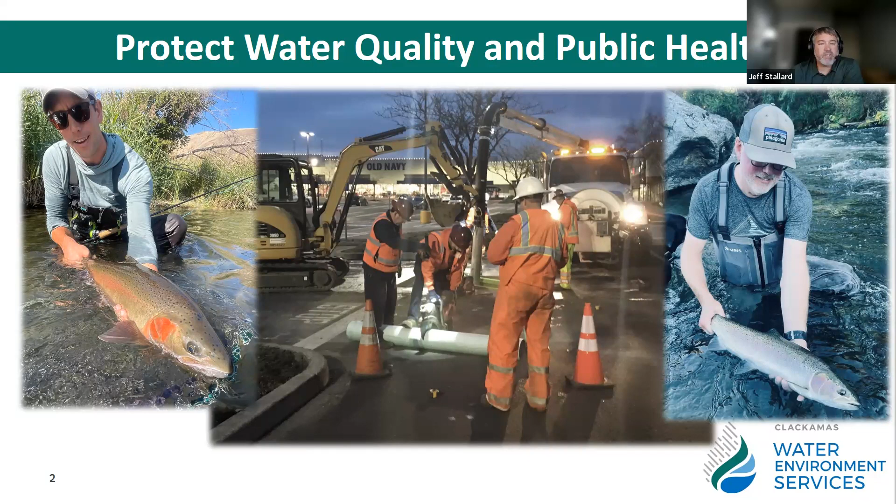So I just want to acknowledge the efforts of the people on this committee and within the WES organization that continue to be dedicated to protecting our environment, protecting our water quality and advocating for public health. I love exploring the outdoors and it's something I'm passionate about. So thank you very much.

Quick outline of what I'm going to be talking about. I'm going to give a background on the capital improvement plan development. So what's the basis and how do we build our capital plan? I'll spend the bulk of the presentation talking about the updates and the projects that we currently have underway. A little bit of one slide on next steps and what we can expect to see. I'm kind of setting the table for the next presentation around an updated capital improvement plan for 23 through 28. And then I'll hopefully have extra time for questions.

So our CIP is developed with extensive planning efforts. Over the last 6 years, WES has really embarked on a planning journey, and out of each of these plans come recommendations for improvements to either provide additional capacity or address condition deficiencies within our infrastructure. We take all of those projects or recommendations from these plans, we try to prioritize them and schedule them based on what's the driver and how much the costs are, and build an implementation schedule, and the result is the capital plan.

Many or most of the projects you'll see are interrelated. If we're making an improvement at the treatment plant, we have to make sure all the downstream capacity is there, which is why we're working on an outfall. But I just want to address that it's really thoughtful planning, which is critical to ensure that WES is making the right sized investments at the right time to address the needs.

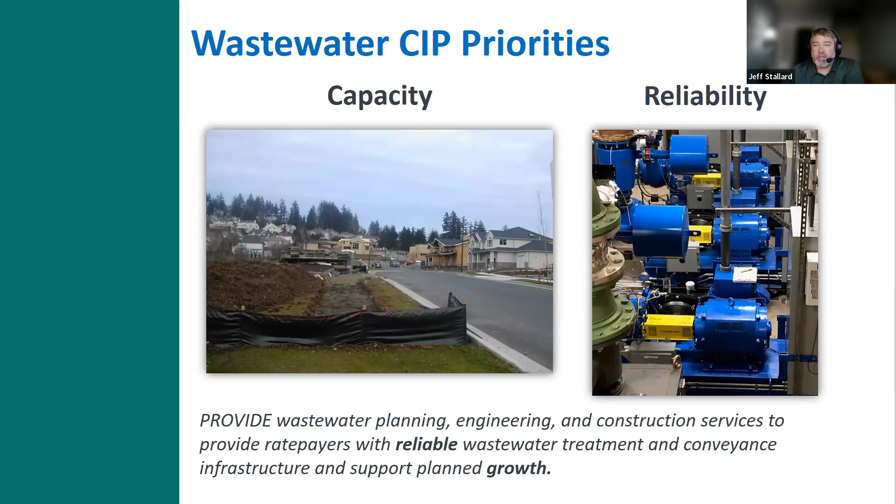You can see about 60% of our capital expenditures really are about reliability. It's about making sure that we're replacing aging infrastructure before it fails. And 40% is capacity. So it's about a 60-40 split between reliability and capacity. And that's not only true for the next 5 years, but if we look even further in our planning documents and project out a 12-year look ahead, we still see the same thing, about 60% reliability and 40% capacity.

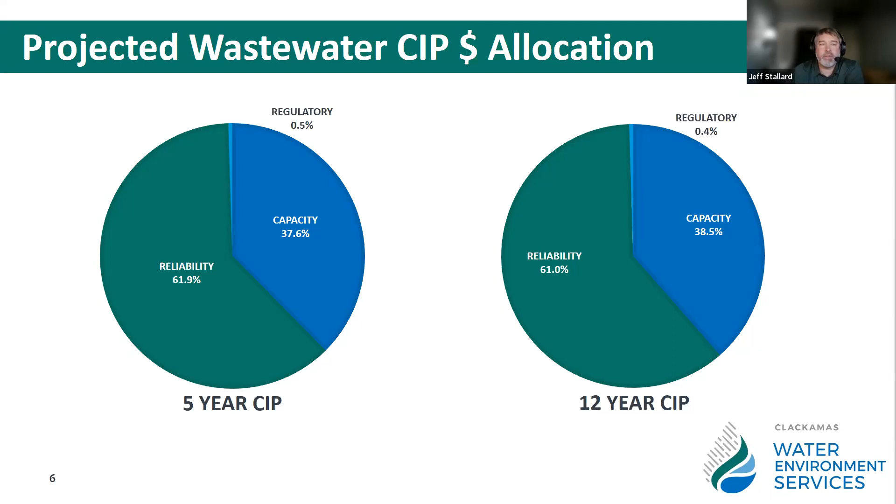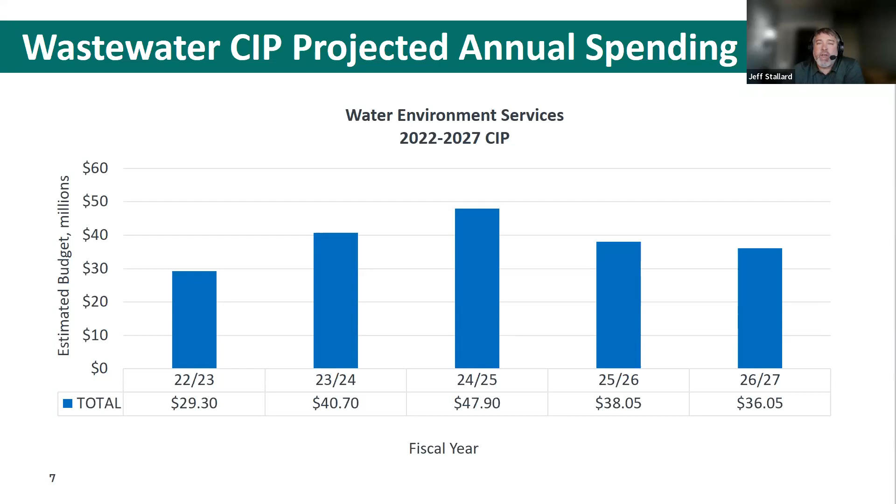Just a reminder on what the 5-year CIP looked like that was approved in 2022. As you can see, we have a lot of money to spend over the next 5 years, and we're working really hard to do that. But in the end, we can have all the planning documents we want in the world, but if we're not actually implementing the plan, then we're not doing our job. And so I want to take just a second to really dive into how we are doing delivering the CIP.

Looking back at the 22-23 CIP, we had planned for 25 projects to be underway or being worked on. We're currently at 24. We're working on 24 projects. We did decide to postpone one project that was determined, once we started to dive into it, that it really wasn't necessary at this time. The solids project really handled that, so we could delay that work a little bit.

So that's projects. And then when we look at budget, we had budgeted $29.3 million, and we estimated to spend $17.8 million. So we're a little underspending. Some of that is due to equipment delays and things of that nature where construction just didn't quite go as fast as we had planned for. And overall, we have 51 active contracts. That's between design engineers and contractors that we're managing as a capital improvement group. So we're all very busy.

So what really impacts our ability to deliver the CIP? A lot of it is staffing. How do we have the capacity in place to really have the project delivery staff to do that? I've been with WES for 6 years now. And in my 6 years, we've really only had a full capital engineer group for about a year of that time. We've had 3 retirements, we've promoted 3 within. So there's been this constant state of change, but it's not all that people are leaving. Some are retiring and some are getting promoted, and we're bringing in new people.

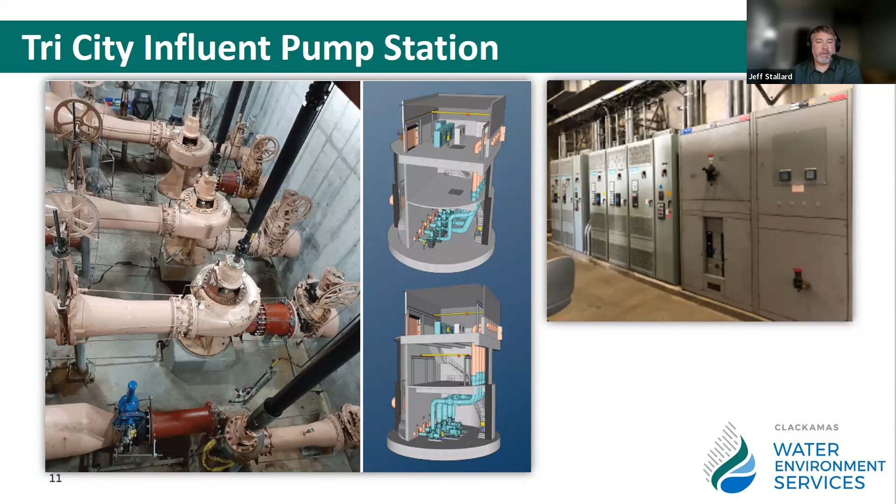So we are doing an overhaul of our primary clarifiers at the Tri-City facility. We're rehabilitating the concrete inside the tank, and we're replacing the mechanicals. But before I talk about it, I want to take a moment to outline what exactly the purpose of a primary clarifier is. The primary clarifier is the final physical treatment process that removes solids before the biological treatment starts. So wastewater enters the clarifier tanks.

The flow is slowed down significantly, and floatable solids, which we call scum, are removed by surface skimming. And the settleable solids, which we would call sludge, are collected on the bottom of the tank. They're raked down to a low spot, a sump, in this basin, and scum and sludge are pumped over into our digesters. The effluent of this tank's next step is biological treatment. It leaves the clarifier over a weir and heads towards the aeration basins.

To paint the picture, you get about 90 to 95% of the settleable solids out in this process. It's a very effective process and is critical to making sure our plant runs well. All the original equipment has been in service since the mid 80s when the plant was brought online. As I mentioned before, this project consists of replacing all of the mechanical equipment and repairing the failing concrete surfaces.

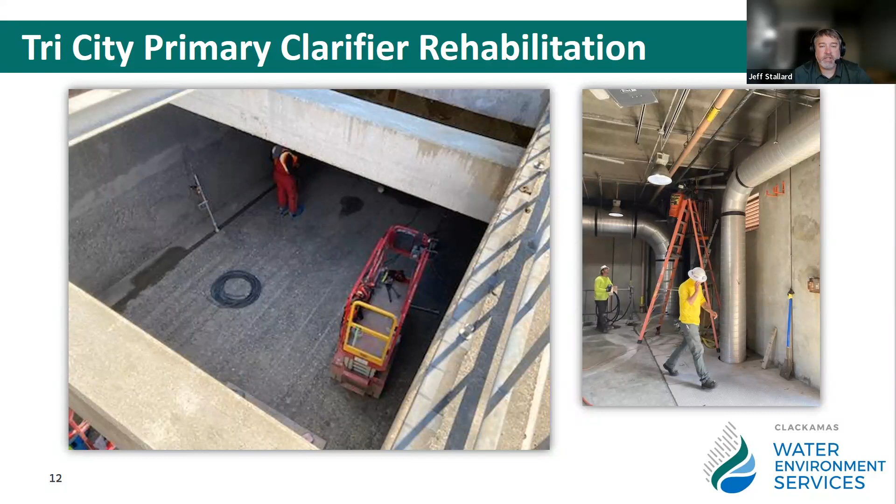The third big project we have going on is at the Tri-City Outfall, and I've presented on this, so I won't spend a lot of time talking about it in detail, but the current outfall was constructed in 1984. It's nearing capacity in our peak wet weather events. We are negotiating with a contractor right now for price to build the outfall.

The plan would be to start construction early in 2024 and build out to the river, and then come back in the summer of 2025 and finish the last portion of the pipeline in the river in the 2025 in-water work period.

It's a 90-inch or 7.5 foot diameter pipe. And we are working on an online virtual tour for those interested in the project. We expect to have that available by fall, and we'll be updating that with pictures and videos as the project's built. It's a pretty exciting project and one of the bigger tunnels in our region.

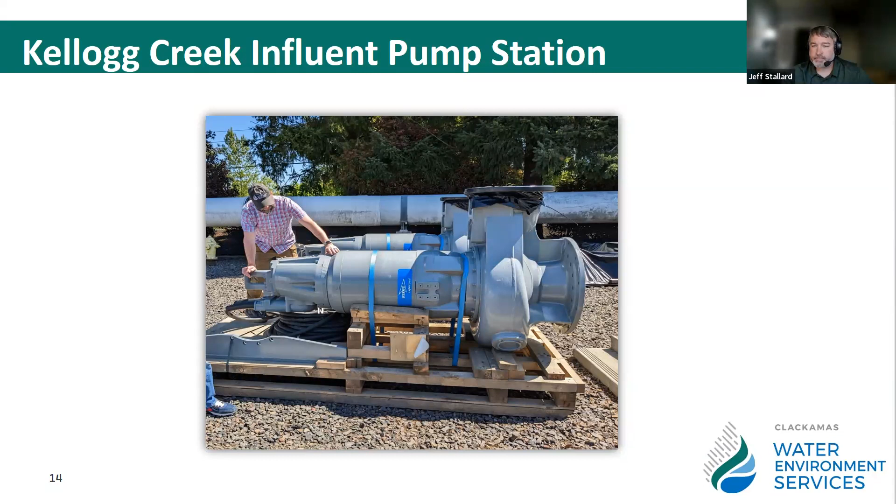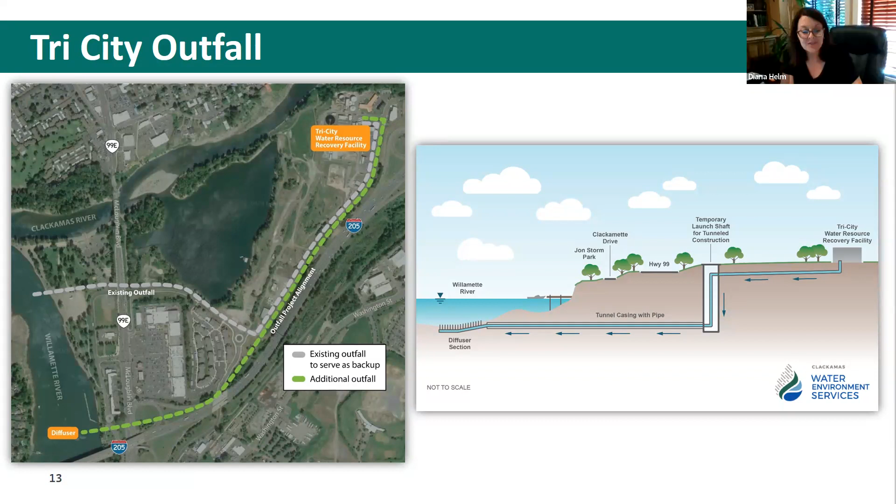Influent pump station at Kellogg. Next project we have at Kellogg Creek is the aeration basin improvements. The aeration basins are where the biological treatment really is. They're the heartbeat of the liquid treatment process at the facility. This is where air is supplied to the flow stream, which allows the bugs to grow and remove the organic pollutants present in the wastewater. The control of oxygen in these basins is critical.

And for biological control, to make sure that we're growing the right bugs. Every microbe has different conditions it likes to grow in, and we want to control our oxygen to make sure we grow the right bugs. But also the blowers are the biggest energy users at the facility, which is a direct cost to us. And so better dissolved oxygen, or oxygen in the water, control will reduce energy costs. And this is another one that we've worked with Energy Trust on. We intend to get some money on this project.

So the main aeration blowers were replaced as part of the Kellogg Creek Improvements Project in 2017. However, much of the instrumentation and control systems that we currently use are nearing the end of their useful life. So we're going to upgrade those as part of this project and bring it up to current standards. And similar to the primary clarifier project at the Tri-City facility, we're also addressing any issues with the concrete in the submerged portion of these basins.

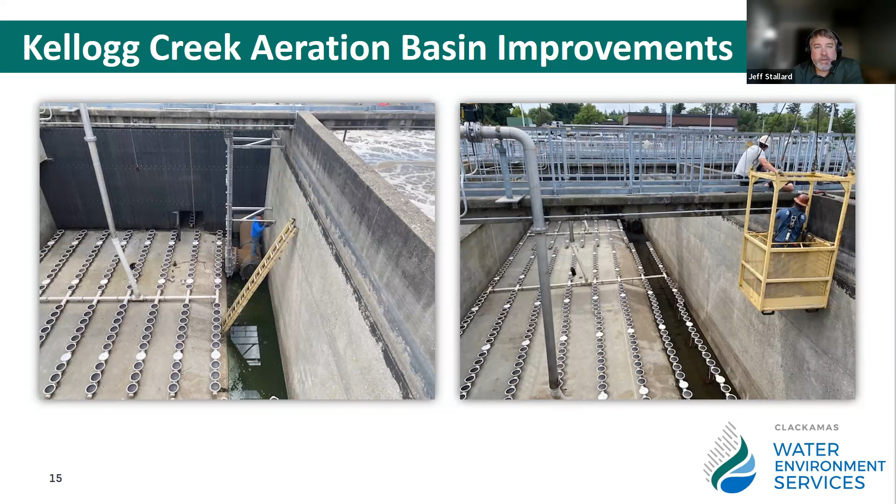We collect that sludge. We send some of that sludge back to the front of the aeration basin. That's called return activated sludge, or RAS. And then we take a portion of that sludge and we send it to the digester, which is waste activated sludge, or WAS. If we left the bugs to grow uncontrollably, that would cause upsets in our system. So we manage the biomass closely to make sure we have the right bugs growing in the aeration basin, but also that we're not keeping them too long.

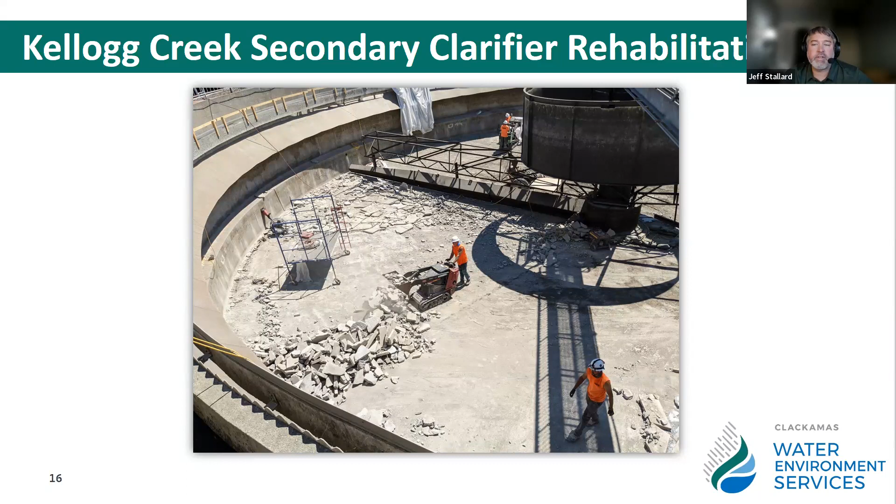The secondary clarifier rehab project, one basin was completed last summer, and the second basin is underway this summer. So we're putting in a new drive and mechanisms. We're grouting the floor, and we're recoating. We're putting in new drives and weirs. We're repairing any concrete issues we find when we have it taken offline, and we're recoating the existing mechanisms.

And then the last project at the Kellogg Creek facility is an administration building improvement project. If you haven't been in the Kellogg Creek admin building, it was constructed in 1973 with the plant construction, and I won't say it's starting to show its age. It's been showing its age. So this project will focus attention on the locker rooms, the lunch area space, office space. It's a real overhaul of the interior. But particularly, we want to make our organization a place that people want to come in and work for, and providing nice facilities is part and parcel to accomplishing that.

So I'll just note that soon our lead operator at our facility here will no longer have to shower in a coat closet that was original, that's been converted into a locker room. I think it's just a good thing to do for our staff, both present and future. And I should note that one of the other drivers for this project is it is the first step in building dewatering and solids handling at the Kellogg Creek treatment facility.

One last, yes. Jeff, can I just add to that footnote about the operator? Absolutely. I had a chance to visit with her yesterday at the WES picnic, and she had very interesting stories about life as one of our first female operators and what it was like to shower in that converted closet. So she's very grateful to have this new facility up and going soon. Just wanted to add that footnote. And we have a lot more female operators who have joined since then. So it's great news. Thanks for your hard work.

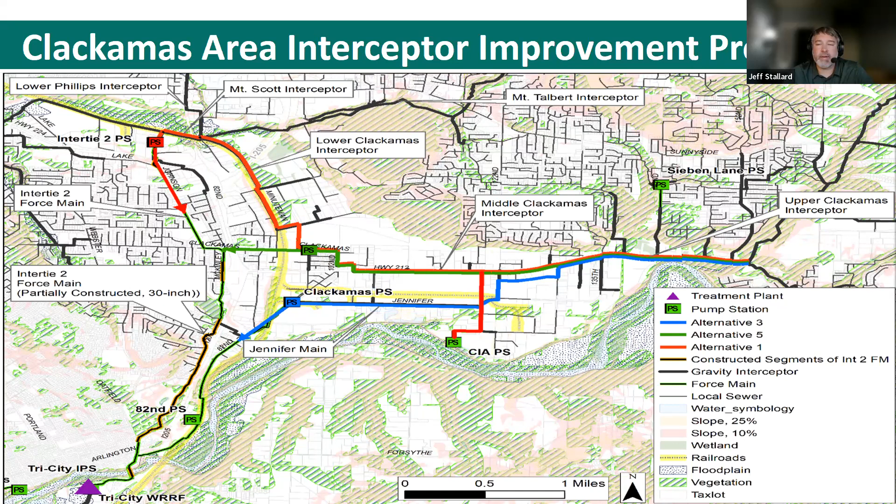The next project in the collection system is the Intertie 2, or the IT2 force main and pump station expansion. And just to be clear, a force main is a pipe that is downstream of a pump station, and it conveys sanitary sewer flows under pressure. So you use a pump to put it in a pipe and put it under pressure, as opposed to just relying on gravity. The IT2 project will increase the capacity at the pump station. It will enhance the controls for better operability, and it will complete the construction of the 30-inch force main.

So you'll see here, there's segments 1 through 7. So the areas in between were constructed as part of the initial construction of the IT2 force main. There's a 20-inch force main, and we're building the second force main. It's a 30-inch force main. It was nice that the previous WES engineers did a really good job of planning and actually constructing the hard to construct segments. These were segments that either crossed underneath ODOT facilities or were drilled through rock. And so those were already built. So we need to just come in and fill in the 7 missing segments to get that flow to our facility.

And for a geographic location, this facility is adjacent to Lowe's. And so this is up here near Lowe's. And so you can see it's a long way to pump flow from that area down to the Tri-City facility.

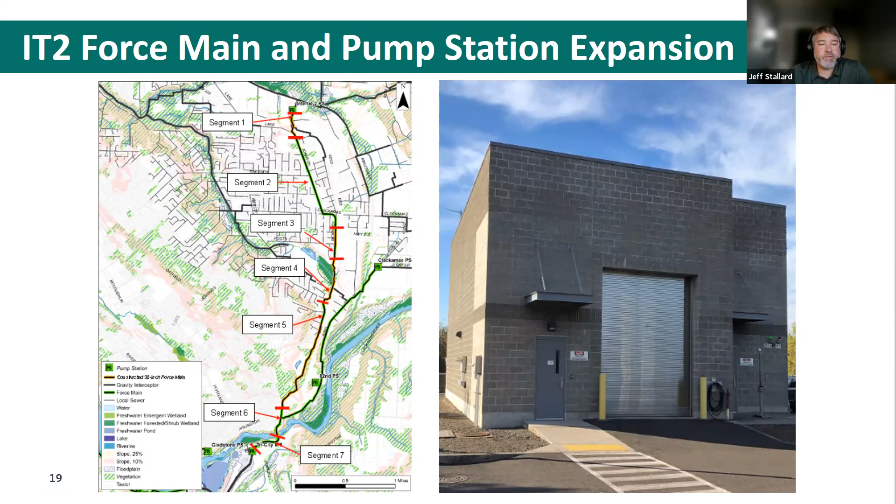Another project in our collection system is the Willamette Interceptor. And so the Willamette Interceptor serves the city of West Linn. It's down at the bottom of the hill near the old Blue Heron Lagoons. That's where our existing Willamette pump station is. This project will replace that pump station with a new pump station and a complete new force main from that pump station all the way across the bridge.

Construction is probable for the 26 calendar year, and we hope to be using the new force main at the end of 26 or by the midway point of 27, depending on availability of some of the electronic pieces that are really going to drive that schedule from a procurement standpoint.

The multi-pump stations improvement project, and this is, I would say, more a program than a project. It's not one single project, but we are touching or making improvements to 9 pump stations within our collection system. The interesting thing about the pump stations that WES owns and operates is, historically they're built over time, and we have a significant number of different pumps, pump types, pump brands, and also a significant number of different variable frequency drives, styles and brands.

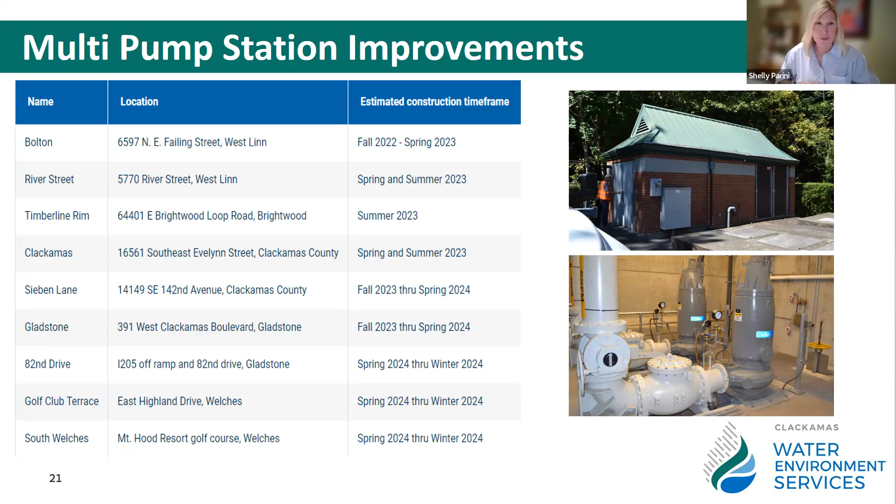We're delivering this project in 2 phases. We replaced the collection system in 2022 and finished that up in early 2023. And we are just kicking off replacement of the actual treatment system this summer. This is going to be a big save for field operations and WES, a lot of overtime and time spent dealing with the headaches of a system that had a significant amount of I&I and really nowhere for it to go. We've already seen a significant improvement in the I&I in our collection system by tightening it up and replacing it in 2022. We're significantly down, and now we're going to fix the treatment system to handle the flows as well and get that up to speed.

And when we walk away, the system really should be something that operations staff, I don't want to say out of sight, out of mind, but it will be a lot less time spent on it and on call outs and equipment failing. It's coming up on 50 years old at this point, and it's really time to manage it.

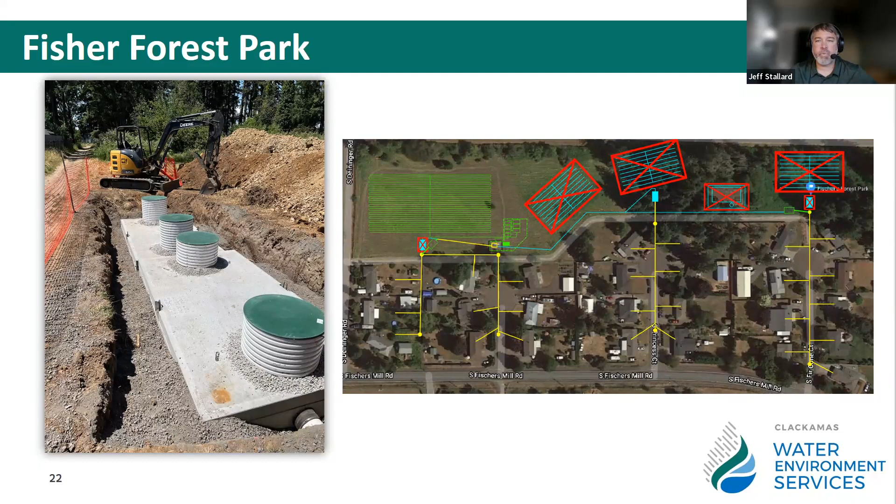So as the capital manager, my vision of our group is really to ensure that WES has the capacity necessary to serve our ratepayers. And the second client I consider is our O&M staff. We're there to support them to make sure that they treat and can meet permit. So in the course of our work, we find things that need to be fixed or replaced.

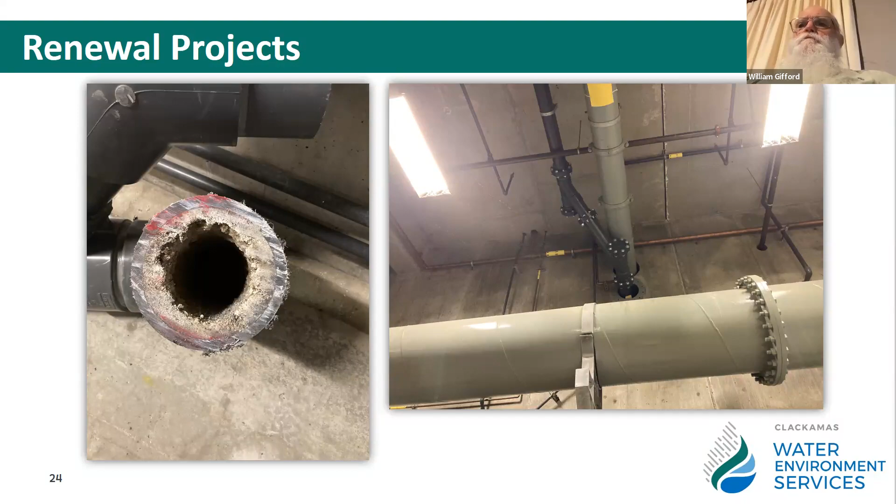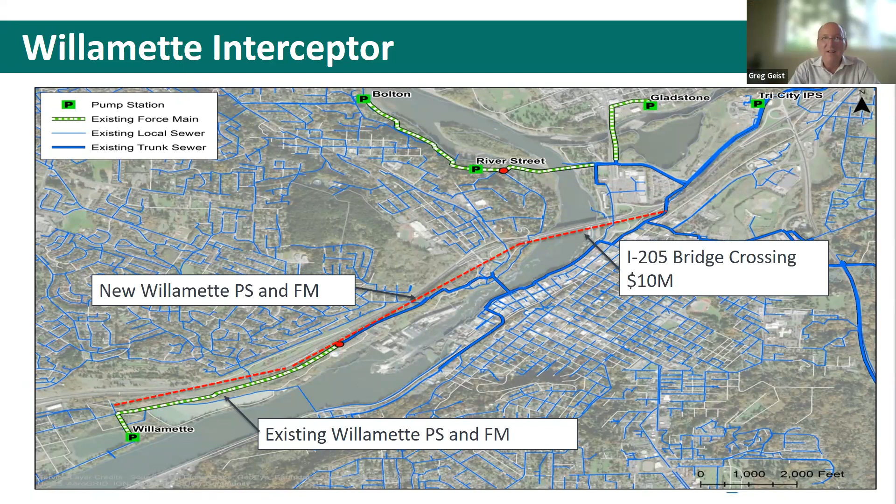I don't have the Wayback Machine, but yes, over the course of history, WES has inherited Fisher Forest Park, Hoodland, and Boring, and we're doing work in those areas. And that's kind of really all I can say about that. Sounds like we adopted them, right? They were up for adoption and we said yes?

Yeah, I think so. And honestly, we are investing in Fisher Forest Park right now, and it's about $1 million. And the next phase of investment to get them to what Jeff calls that 20 to 30 year, we don't have to worry about it, is going to be another maybe $1 million. And if we charged them, they would be paying $300 a month, maybe, for wastewater services.

But when you spread it across our rate zone, it's a couple pennies. So anyway, that's what I would say is, yes, we do have these pockets of need, and we are able to service them in a way that I don't think unduly burdens our current ratepayers.